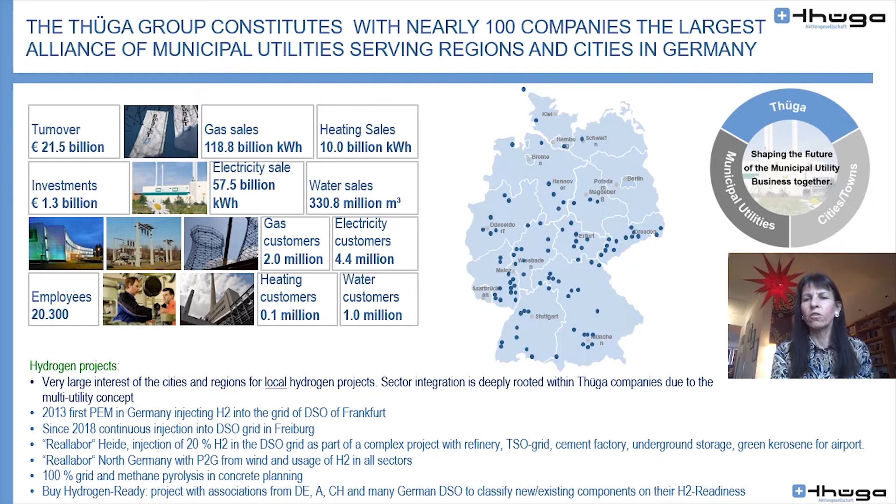But let me tell you first something about the European Hydrogen Strategy, which came out in July. It's the first comprehensive idea for a hydrogen economy with ambitious production targets. They want to build 6 gigawatts and integrate this hydrogen until 2024, and 40 gigawatts until 2030. It is focusing on renewable hydrogen, but other forms of decarbonized gases are also seen as a necessity to speed up the decarbonization of the system.

The strategy foresees 3 phases. Phase 1 is the construction of large electrolyzers close to demand centers, concentration on utilization in industry and mobility, and the planning of the EU TSO backbone, and the installation of carbon capture for existing hydrogen production.

Phase 2 sees the conversion of steel production to hydrogen, the use of hydrogen as a balancing tool for the electricity system, and the creation of the regional hydrogen valleys, which is us, with decentralized production and demand in various sectors, including buildings, and the start of repurposing of the TSO gas grid and underground storages.

Phase 3, which starts after 2030, is a large-scale deployment of green hydrogen, the massive increase of renewable electricity production, and the utilization of hydrogen in the various sectors.

To bring all this in life, and that's a lot of organization of the different work streams, the Clean Hydrogen Alliance was founded to create a project pipeline, a concrete pipeline in the areas of production, transport, distribution, and applications. At the first Hydrogen Forum on November 26, the work was kick-started.

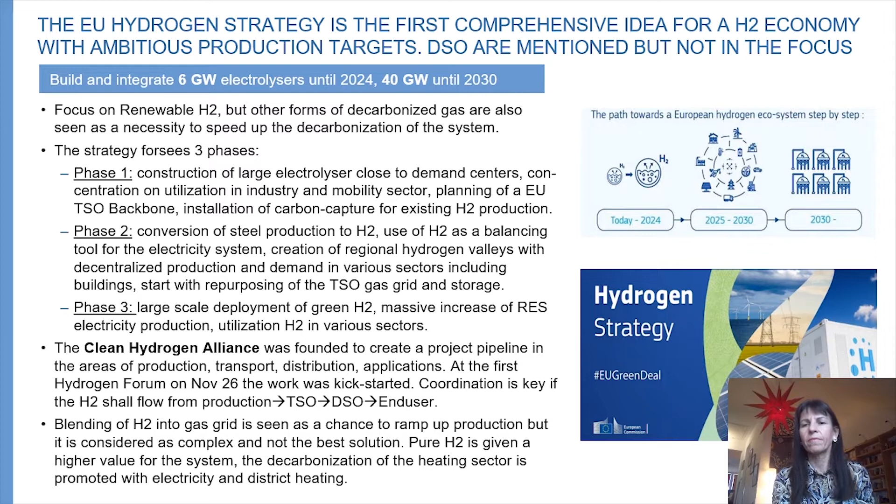What does this mean for us? We have 1,400 European gas DSOs, and we work very closely together in many parallel work streams. Most important is projects, and I love what's happening in the UK because you have so many projects happening and we always look at you.

We have many member states where the large amount of industrial consumers and the CHP plants are connected to the DSOs, which is often forgotten. So the TSO backbone will be key to build an integrated EU market across the borders, but the conversion will require time. Gas DSOs are the only ones able to bring renewable and decarbonized gases to end consumers long before the backbone is finished. To include the hydrogen into the existing market design will speed up the market uptake.

If you don't have a regulation, the hydrogen will end up in a very small market with few customers and producers connected only to the TSOs, because if they are connected to the DSO, you need to have the regulation.

Competition and liquidity needs a broad range of actors. This is what we know from the past. Guarantees of origin are needed to facilitate the trading of renewable and decarbonized gases in pure form or in blends.

Guarantees of origin are needed to facilitate the trading of renewable and decarbonized gases in pure form or in blends. They offer customers the possibility to decarbonize their heating system independent of what is really flowing through the grids. The extension of the gas grid should be considered as sustainable in the taxonomy.

So when you look at this, if you want to create the market, you have the legislation on one side, which in the case of Europe is depending on the Green Deal, but you also have the organization on the other side. And when you think about the organization, as I mentioned before, we have the project pipeline of the Clean Hydrogen Alliance, but we also have the concrete projects in the countries.

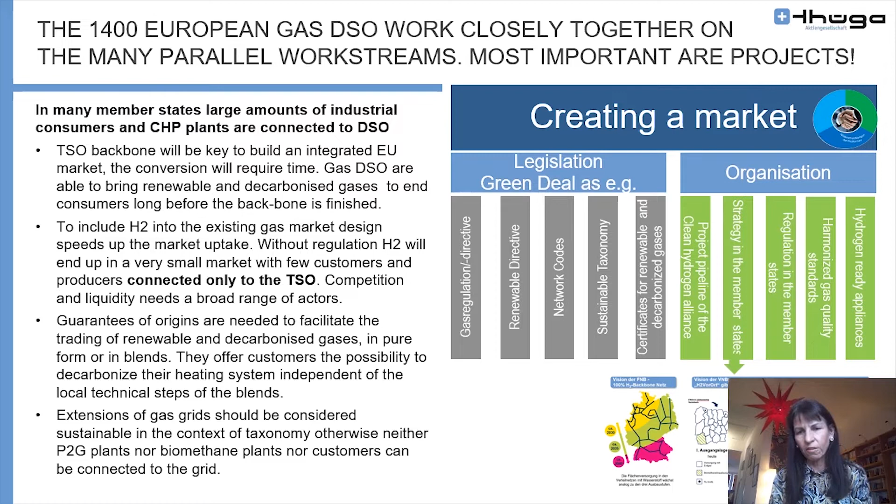This is the project in Germany, where we looked at where does the gas come from and where does it go. With Thüga, most of our companies are somewhere in the south, and that means we have to help ourselves because we cannot wait for the TSO to come.

This means that we have projects. This is the one in northern Germany where you have an electrolyzer built in the refinery. We're going to inject 20% of hydrogen into a grid to serve 215 customers. But we also have a cement production which will then use the oxygen.

This is the best thing that you can do. So you combine all the worlds. You have the industry. There is an underground storage, a salt cavern. But they also produce eco-fuels for the airport in Hamburg.

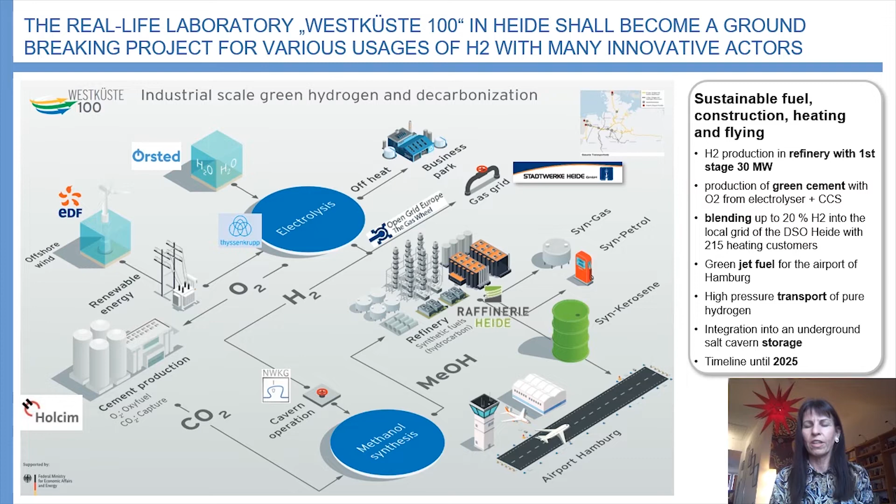And this is giving the benefits that you can use the infrastructure the most. But we also have another project, which is a regional DSO. It's not very large, considered the UK sizes.

It only has 29,000 end consumers, but it has this very specific situation that they have 6 biomethane injection points, and they have very large industrial consumers, the biggest one that we have in the whole group. They have 3 CNG stations which are connected to the grid, and they also have 3 CHP plants, which means that already today they have to deal with all sorts of gases coming into the grid.

And this was the reason why they implemented the SmartSim system, which is a smart grid system. This way we can track the gas, we can define the calorific value and also the Wobbe index at all those exit points. And we will use this when this hydrogen injection comes up here with a wind farm, so that we can track the hydrogen.

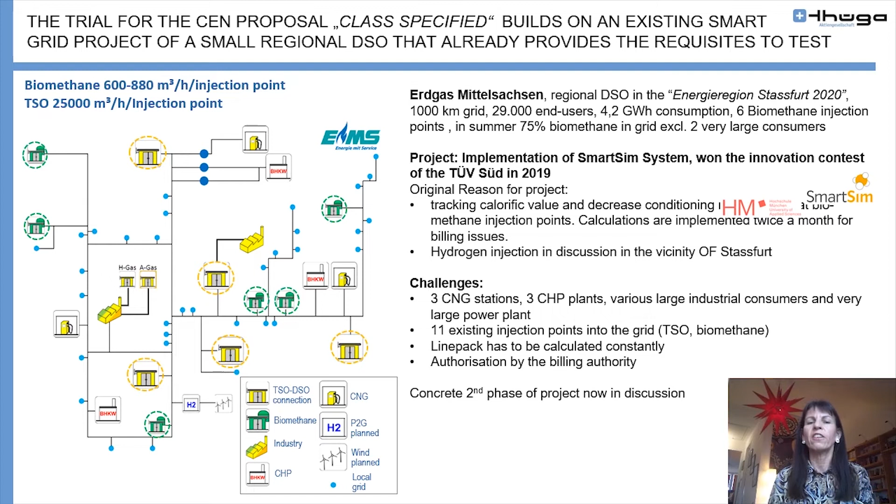And what we will do then is a forecast to know where the hydrogen will go. This is very important if you want to operate this kind of a system. Here you can see the simulation running with all the different kinds of injections that we have, and we can always track where the gas is flowing to the end consumer, which is very important if you want to make sure that you always know, for example, how much hydrogen is in the grid at the specific point of the exit.

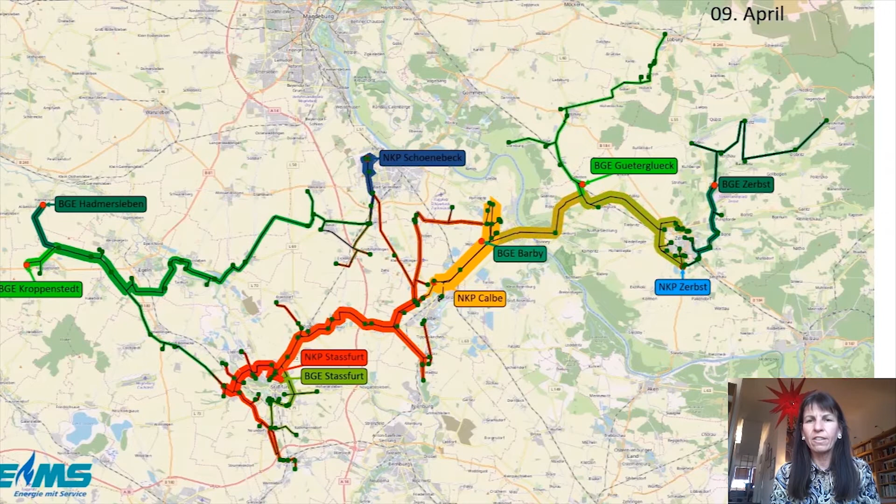This was just a very short introduction of what we are doing in Thüga and what is happening in Europe.

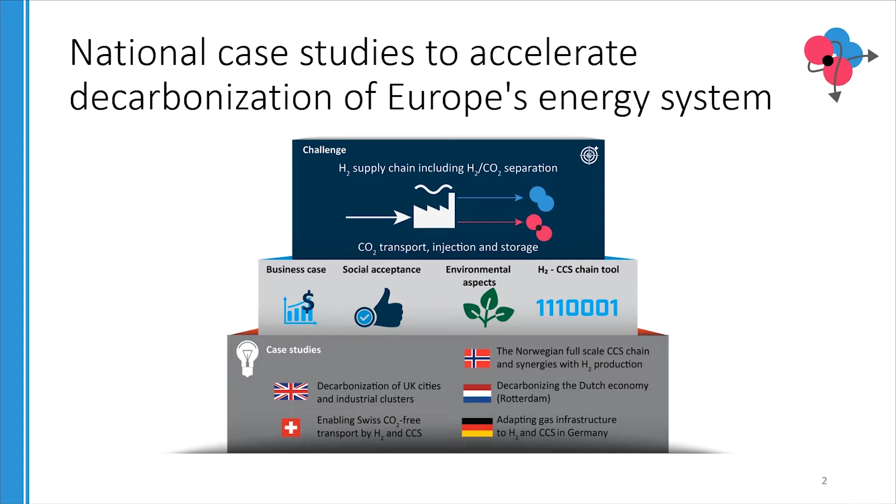Today I would like to focus on the case studies and the case study results. On this slide, you can see the main topics that have been included within these case studies, where there is one case study per participating country.

A key part of the work with the case studies has been to identify the potential role for hydrogen in these countries or in regions of these countries.

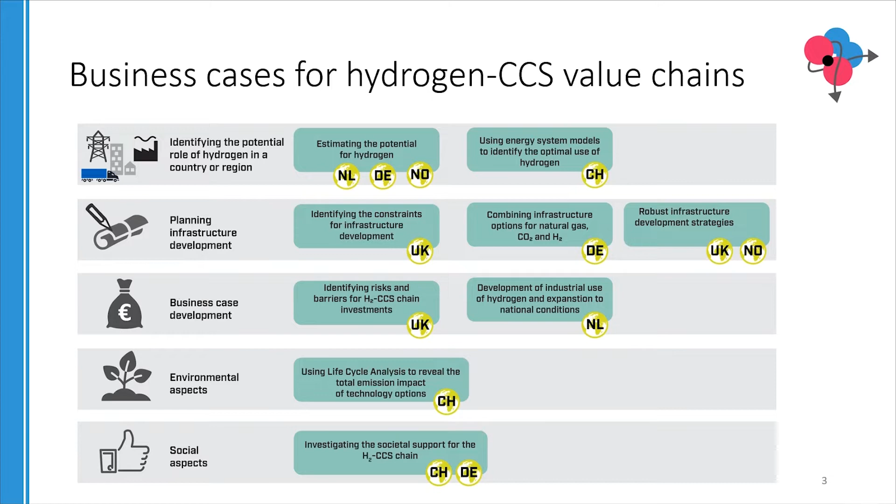The next issue has been to work on the planning of infrastructure development, and to this end the optimization tool for infrastructure development has been applied in several of the case studies. The business case development tool has been used for business case development, and environmental aspects have been investigated through life cycle analysis, and social aspects have also been investigated by looking at societal support for hydrogen and CCS value chains.

Today I would like to present 4 observations of what we have found significant from the case studies. First, the industry sector is key in realizing a hydrogen sector at a sufficient scale to achieve reduced costs for the hydrogen economy.

The second observation is that business cases for hydrogen and CCS value chains must be defined and evaluated in the context of reaching net zero by 2050. Specifically in the UK case studies, it was found that a delivery body or organization is required, with a clear mandate to coordinate the UK system-wide business case for all regions and all sectors. This is key in steering the country towards a net zero economy by 2050.

The third observation is that for several of the cases, developing cost-effective infrastructure relies on the availability of sufficient storage facilities for both hydrogen and CO2. These aspects are key when assessing the possibilities for developing a hydrogen economy and for developing hydrogen and CCS value chains.

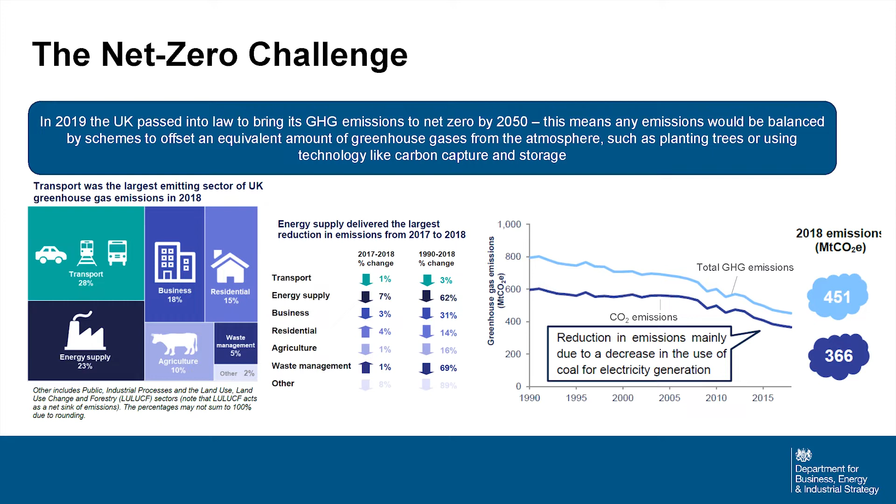However, as we sit here in 2020, in order to achieve 2050 net zero, we appreciate that we have to tackle the much more difficult sectors, including domestic heat, industry, and transport. Our analysis shows that hydrogen is a key vector for achieving progress in all of these areas.

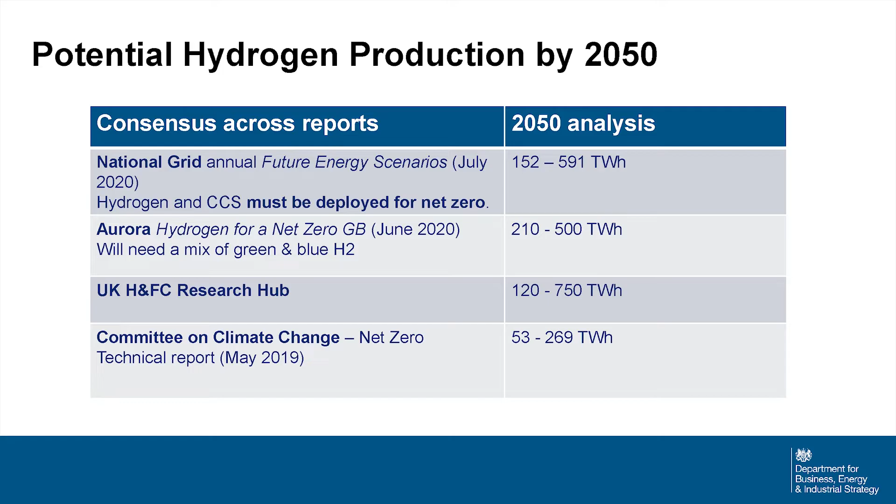I'm now going to discuss in more detail what we've been doing in BEIS using our energy innovation portfolio to develop solutions in this area.

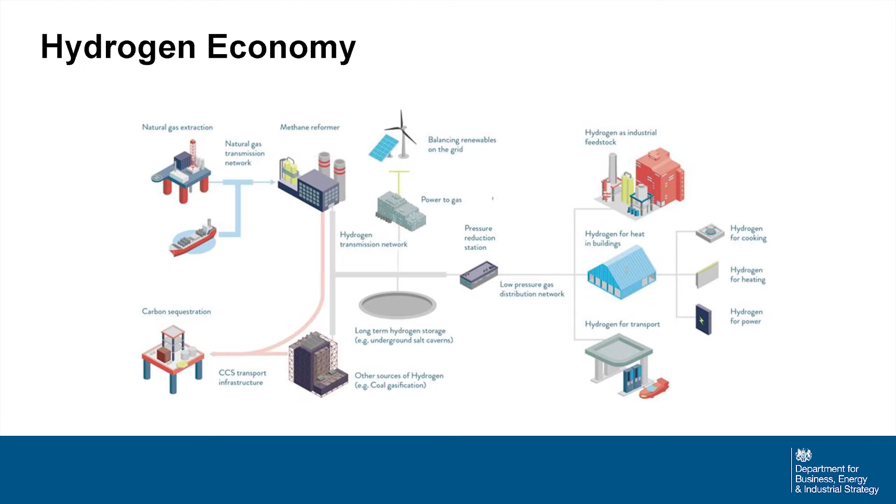Now I present a schematic of how a 2050 hydrogen economy could look. As you can see, it's quite complicated, including capacity to develop blue hydrogen, making hydrogen from methane and capturing and storing the carbon dioxide emitted, and also the capacity to take green hydrogen, particularly from renewables. We also need storage, particularly interseasonal storage, and we're able to supply all three vectors I discussed in the last slide: transport, domestic heat, and industry. I'll now show you how we intend to tackle this via innovation.

We started our innovation competitions with a focus on hydrogen supply. Obviously, for a hydrogen economy you need hydrogen, but we wanted to ensure any hydrogen we were making was compatible with net zero. That means replacing the current technique of steam methane reformation with either blue hydrogen, which is steam methane reformation with carbon capture, or green hydrogen. We are trying to support the development of both technologies.

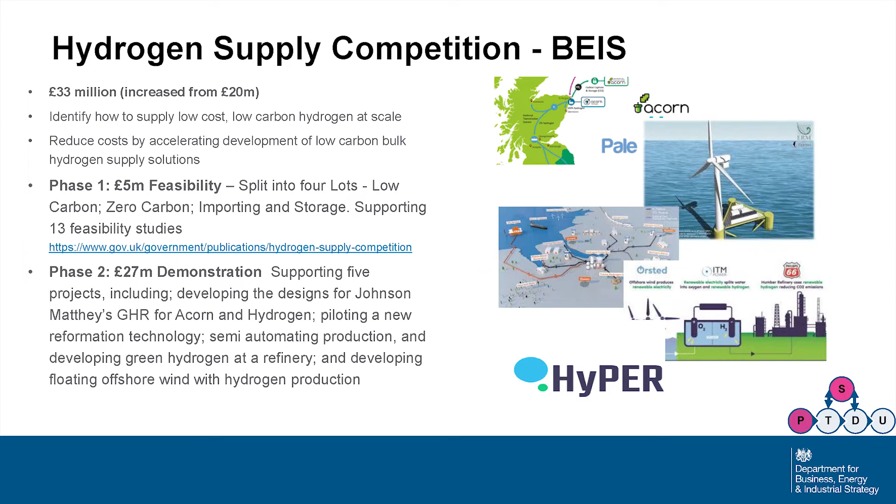We received an overwhelming response to our original £20 million competition and ended up allocating £33 million. This includes development of advanced thermal reformers with very high carbon capture rates, for deployment in UK industrial clusters by the mid-2020s. We are also supporting development of green hydrogen technology using offshore renewables, including a project generating hydrogen using floating offshore wind. Now I'd like to present a case study of one of our green hydrogen supply winners.

This is a consortium of Ørsted, Phillips 66, and ITM. What they're looking to do is take renewable electricity from offshore wind, produce large volumes of hydrogen using a large-scale electrolyzer, and use that hydrogen in the refinery process to drive down CO2 emissions.

On the graph on the left, you can see ITM's own analysis of the impact of the BEIS innovation funding. Their graph clearly shows that our innovation funding, intervening at this stage, greatly enhances their chances of delivering large-scale electrolyzers by the 2030s, and this is exactly what we want to achieve.

As you can see, it includes a FEED study for a 100 megawatt electrolyzer, an order of magnitude larger than the largest current electrolyzers. This is exactly the scale we need to meet the volumes of hydrogen production I talked about earlier in this talk.

A particularly exciting component of this project is that, as well as developing the technology for the electrolyzer itself, we are supporting development of the manufacturing equipment to enable large-scale production of these electrolyzer stacks. This is leading to the development of the largest PEM electrolyzer factory in the world, in Sheffield, by ITM.

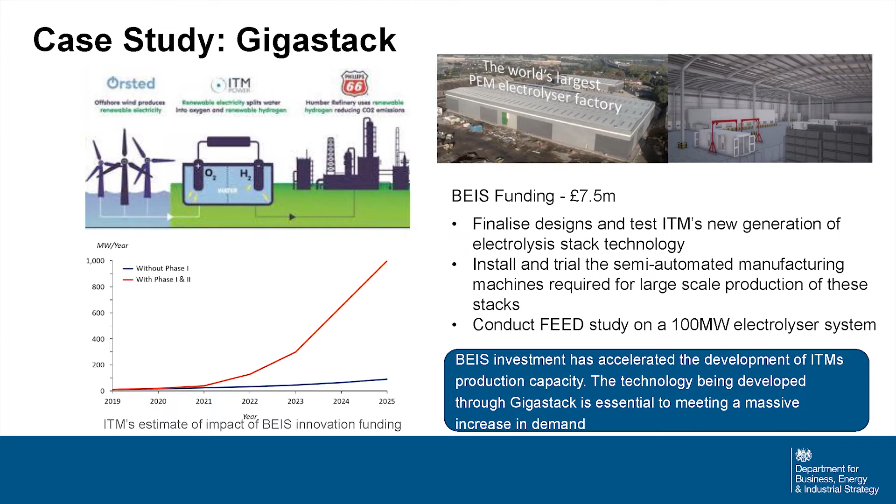You will shortly hear from a number of other speakers about the innovation that's taken place using Ofgem supported programs, NIA and NIC. They will tell you how we are developing solutions to decarbonize the national grid and the distribution grid, ready for the hydrogen transition.

I'm now going to talk about one of our innovation programs, industrial fuel switching, which tackles the decarbonization of industry. In beginning this program, we first did a comprehensive survey of the industrial sectors in the UK and identified decarbonization routes for all of the industrial processes currently taking place. We found that hydrogen was a key vector for a large number of these processes.

However, we met one challenge: many of these solutions are at quite low TRL levels, typically between TRL 4 and 7, nowhere near the TRL 9 level required for any industry to convert fuel with confidence. What we want to do with our program is develop programs that enable us to demonstrate and start to develop these solutions, moving them up the TRL levels, ready for deployment in a hydrogen economy.

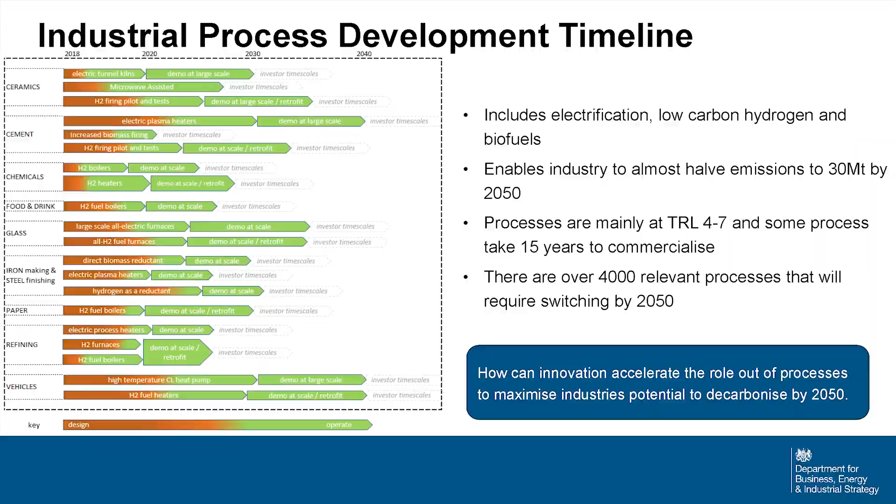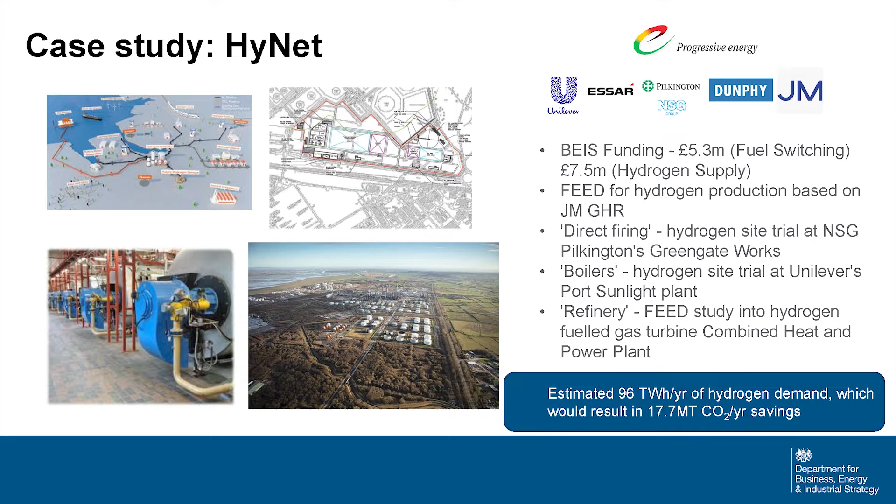I would now like to showcase the HyNet Project, which has benefited from two of our innovation programs, the Hydrogen Supply Competition and the Industrial Fuel Switching Competition. In this program, they will be developing a low-carbon hydrogen production facility using Johnson Matthey's Advanced Thermal Reformer. This will be installed at the Essar refinery site, and we will also look at the usage of hydrogen following this project. This includes a CHP at the refinery site, and also looking at the use of hydrogen for direct firing in the manufacture of glass at NSG Pilkington, and the use of hydrogen boilers at Port Sunlight Unilever site. This is a demonstration of both how a hydrogen economy might work, and there are plans, by using blending as a means to boost hydrogen consumption, to be able to convert the entire Northwest to a hydrogen economy. We're delighted to be supporting this work.

I'm now going to discuss one of the biggest challenges we face, which is the decarbonisation of domestic heat. 85% of UK homes are on the gas grid at the moment, so they are heated by methane. And methane, when it's burned, produces water vapour and carbon dioxide. We would like to explore using hydrogen in place of methane. In order to do that, there are a number of fundamental things we need to do, because the physical properties of hydrogen are very different from methane. The way it burns, the way it behaves as a gas, the way it diffuses needs to be understood, and we need to develop appliances that can effectively use hydrogen safely in the home.

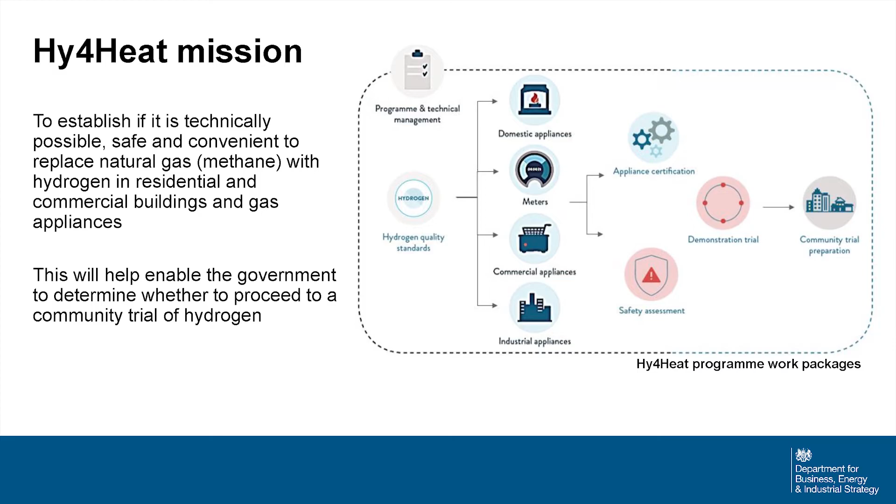To do that, we have developed domestic appliances using the Hy4Heat program. We've developed commercial appliances. We have investigated and evaluated solutions for industry, some of which I've already shown you. We have also developed hydrogen meters, because obviously we need to be able to measure, just as we do today, the amount of gas being consumed by the consumer. We have also developed a number of key standards, including PAS standards for hydrogen appliances, and we are currently preparing the ground for PAS standards for the installation of hydrogen appliances. And we have also developed standards for hydrogen gas, and definitions that can be used in any national rollout. We are doing this work to prepare the ground for community trials where we can deploy hydrogen in a community, demonstrate its effectiveness for the consumer and its safety for the consumer.

Here is some more detail of the appliances we developed under the Hy4Heat programme. Of particular interest is the concept of hydrogen ready, which we've deployed on our hydrogen boilers. So rather than producing hydrogen boilers, we produce boilers that can run on both methane and hydrogen. What it involves is you could buy a hydrogen ready boiler on the market, hopefully by 2025, and burn it with methane. But if your area was to convert to hydrogen, for example in 2028 or 2030 or even later, you could deploy a kit that would convert that boiler into a hydrogen boiler, at minimal charge on top. So this would allow us to start a rollout of boilers that are ready for a hydrogen transition before we have made a final decision about the hydrogen transition.

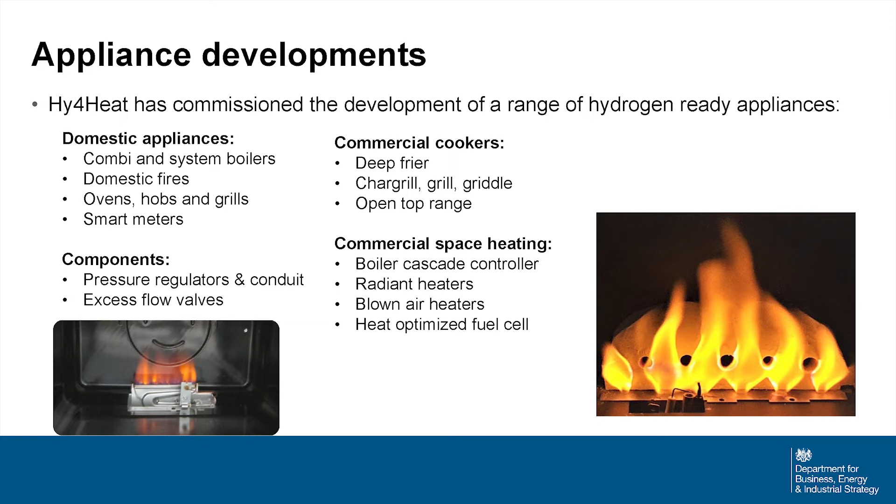We've also developed a number of appliances. I've shown you here a hydrogen fire and a hydrogen oven, and I hope you'll agree with me that the flame looks very nice indeed. I think this has set an important step forward to give the government confidence to proceed with a hydrogen rollout. You can see from the Prime Minister's recent 10-point plan for a green economy, we can set out ambitions to have a hydrogen town by 2030. Of course, there's a lot of work to be done before that, but Hy4Heat has already had a positive effect on government policy and allowed it to send positive signals like this.

The most important component is the development of a safety case, which we have currently submitted to the HSE. What we're looking to do there is persuade the HSE that we understand hydrogen well enough to proceed with small-scale trials.

Over the coming years, we will seek to develop our understanding further to enable us to move towards larger-scale trials, and indeed a hydrogen town by 2030.

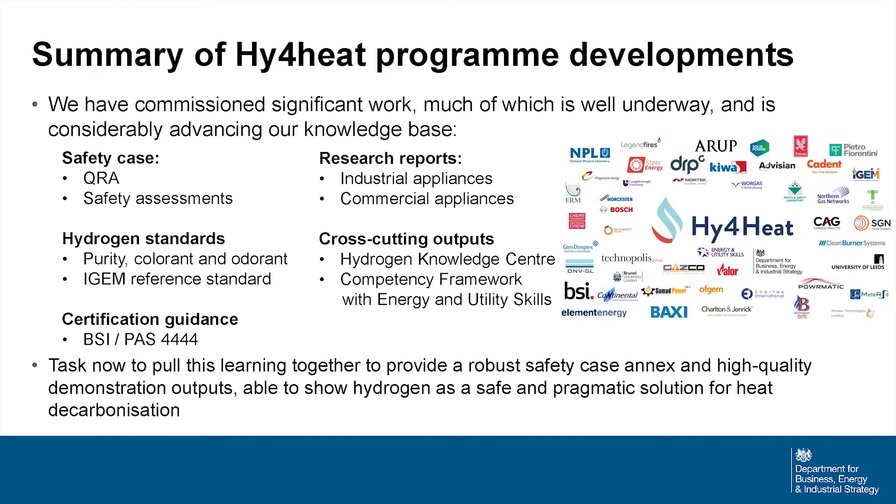As well as establishing a robust safety case for the use of hydrogen in the home, it is very important that we can demonstrate to consumers the capabilities and behaviour of hydrogen in the home. As part of that, we have developed a number of demonstration facilities.

One is a mobile facility, which we'll use to showcase all of the Hy4Heat programme work at COP26 next November. But we are also looking to expose the consumer to hydrogen directly.

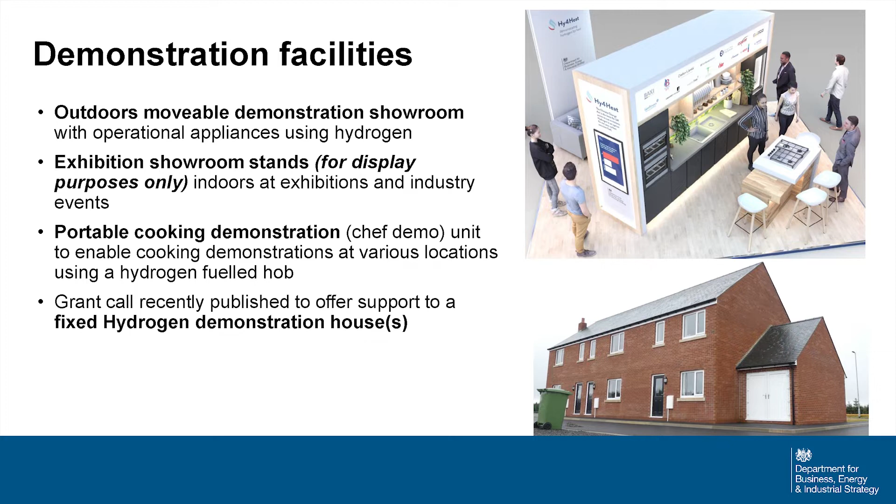One way we can do this is with our current Hy4House call, which is looking at one or two hydrogen homes that can be visited by members of the public, but also by politicians, local politicians, and other stakeholders that we may want to engage in preparing the ground for a trial.

Now we need to think about next steps. In fact, the next steps are really building on this foundation and continuing to develop technology, moving it up the TRL levels and proving it, particularly for industry.

So we need to develop appliances in the industrial sector that industry can be confident will deliver when they switch their production lines to hydrogen.

We also need to start moving towards deployment. You've recently seen from the Prime Minister's 10-point plan that the government will start to invest significantly in low-carbon hydrogen production facilities. It's really important we do that because we need the hydrogen production capability in order to get to net zero.

But we also need that volume of hydrogen to do the testing that we need for industry, and to do the trials that we need to do to prepare the ground for deploying hydrogen for domestic heat.

We also need to continue to develop the work we've done on Hy4Heat. That includes developing further standards, skills training, and further refining the safety case, particularly with a view to more complicated properties than the two-up, two-down we've looked at so far.

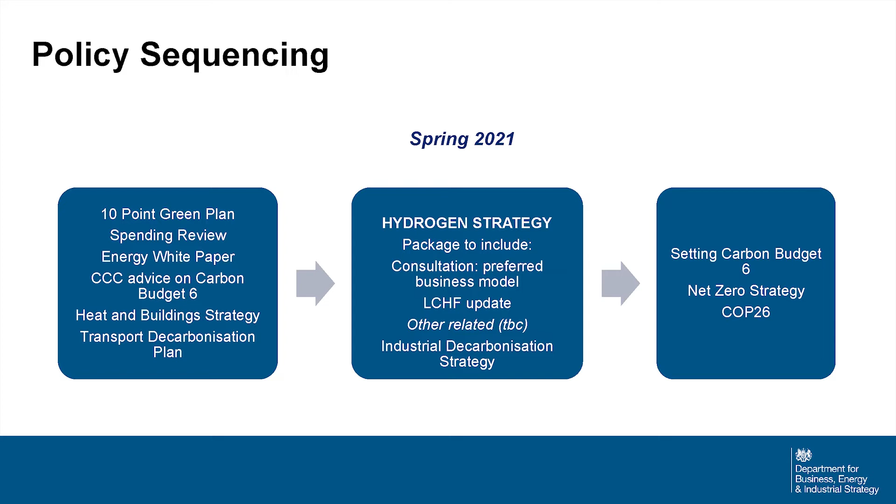Also, in the longer term, we have the opportunity of COP26 to showcase what the UK is capable of. We're also developing a number of strategic papers, including the Energy White Paper, which is due quite soon, and also the Industrial Decarbonisation Strategy.

All of these provide the ideal landscape for us to turn the innovation I've just shown you into deployment, and more importantly, into solutions that will deliver net zero. Thank you very much.

Hi, I'm Tim Harwood, H21 Project Director, and I'm going to spend the next few minutes giving you an overview of the H21 suite of projects.

The purpose of H21, in a nutshell, is to focus on demonstrating that the existing UK gas distribution grids can be repurposed to carry 100% hydrogen in a very, very safe way, with minimum disruption to customers.

So what have we done so far? H21 is split into 2 phases at the moment, with the potential for a 3rd phase, which I'll come on to speak to you about at the end of the presentation.

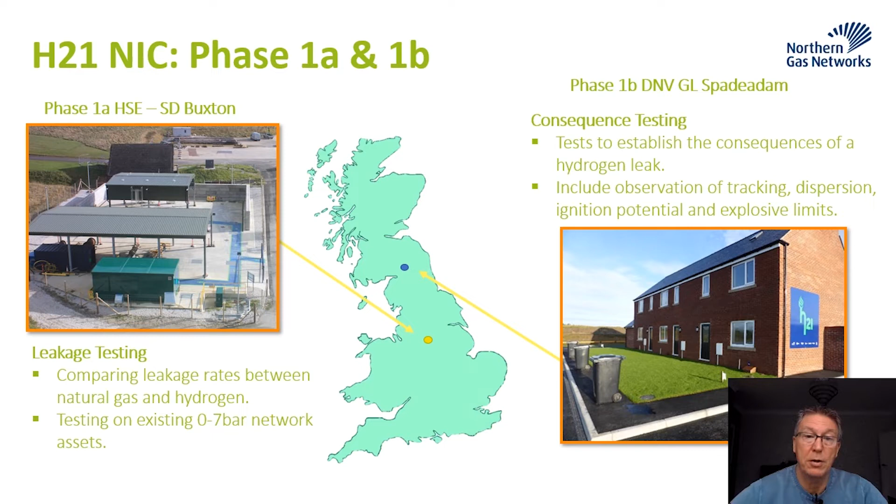Another important part of the H21 trial is the social sciences. We feel this is just as important as the scientific research, in that we must have social acceptance of hydrogen in order to be able to push forward the programme of widespread conversion of networks.

The great news is we worked with a fantastic university in Leeds called Leeds Beckett University. They're really good at doing the social sciences work, and the results are really good for us and really positive. The public felt that safety wasn't a major concern. Obviously, cost and disruption are the two main barriers, but it was felt that if we took a big step towards decarbonisation by converting the networks to hydrogen, they would be prepared to pay a small premium for that.

They're able to digest quite technical information and return it and explain it, but what they don't like is acronyms. They don't like difficult terms like decarbonisation and other things like carbon capture and steam methane reforming. They want to be told the facts, and they want to be brought along with the journey, but they'd like it done in plain English.

Keywords and phrases are important, and some of the further research we've done in phase 2 of the social sciences shows that how you explain things to customers via letters and social media, how you change keywords, is very important in getting them to understand and sign on to what we're trying to do. So alongside the safety related work, it's very important that the social sciences are also taken account of - it's every bit as important as the safety related things we're doing at the moment.

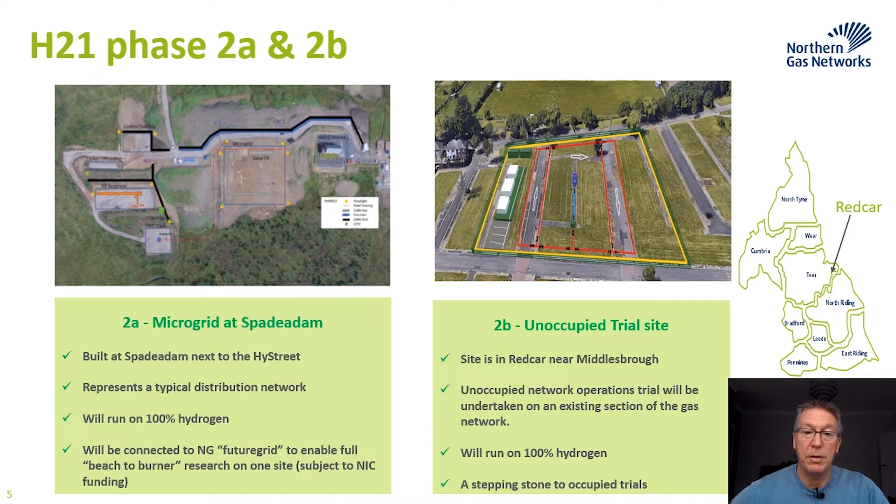I'd like to spend a couple of minutes talking about the potential next phases of H21, Phase 3 and beyond. We've got a funding bid in and we're talking to BEIS at the moment about Phase 3, which would be a continuation of the work from Phase 1 and Phase 2 and basically would finish the programme off. We'll have gone from scientific research through to trials on secure networks and unoccupied trials, and now we need to finish off the programme by doing trials actually out there in the community of live 100% hydrogen in people's homes.

We've put forward a proposal to do a trial starting off with Phase 3A, which is 50 houses, and then Phase 3B is a further 620 houses. The timings for those are Phase 3A, if everything goes well with Phase 1 and Phase 2 and we get the sign-off from our regulators, we could be potentially doing live trials in houses by the midpoint of 2022, and then approximately 12 months later, expanding the trial out to a further 620 homes for another year. So you're talking about mid-2024 getting up to 2025 when we could have finished our programme and demonstrated that we can run and manage safely and effectively 100% hydrogen networks.

And then we should be getting ready for conversion after that. It's a case of a government policy decision coming along and the stimulation of production, so there's plenty of hydrogen freely available to start planning out to do conversions. We're really pleased that in Northern Gas Networks' geographic patch we've got places like Teesside and the Humber region that are touted as being the start of the industrial clusters. So there'll be the decarbonisation of large process plants, power generation, steelworks, glassworks, those types of things, but also making sure there's enough hydrogen available to do homes.

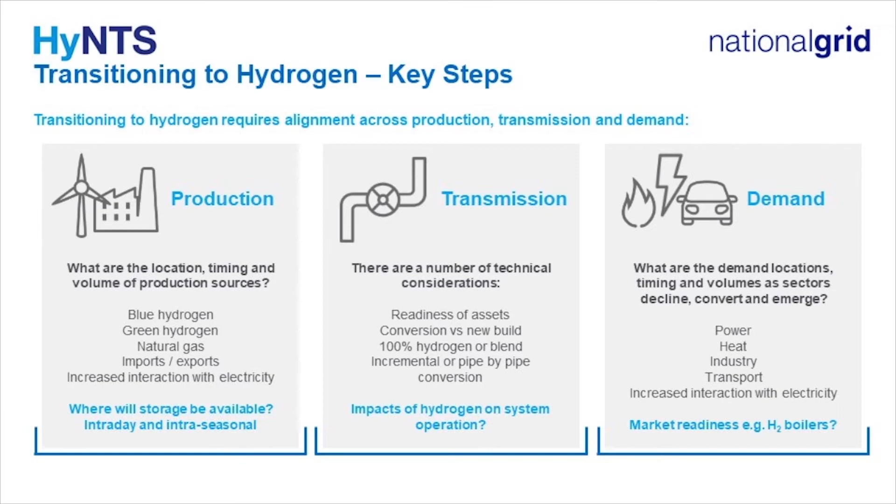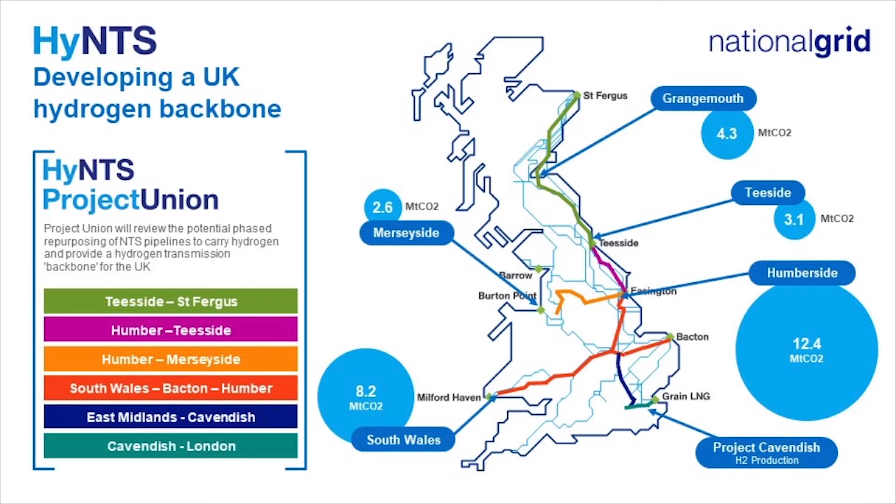So this is in concept phase at the moment. We're working through the realities of this, looking at the feasibility and timing, and it's something I'd hope to be able to talk more about in the future with you.

So the first of them is materials concerns, looking at things like the materials effects on pipelines and mechanical assets. You may have heard of hydrogen embrittlement. We're trying to understand what that means for our pipelines, whether we can still operate as we do today, or whether we need to introduce some sort of mitigations to reduce the effect on the pipeline steels.

We're also looking at things like soft parts and seals. We've heard that, for example, metal sealing valves are perhaps more suitable for hydrogen than soft sealing valves. And we're looking at things like weld quality and how that interplays with hydrogen embrittlement to change the risk profile of our pipelines.

The second is safety concerns. Hydrogen is quite a different gas - it has different characteristics in terms of building proximity distances, and the heating value from flames and explosions. We've got to rethink things like the hazardous areas around our equipment, since it has a different gas classification in terms of the electrical equipment you can use around it, so we'd have to evaluate all the electrical equipment across the network and understand whether that's still compatible.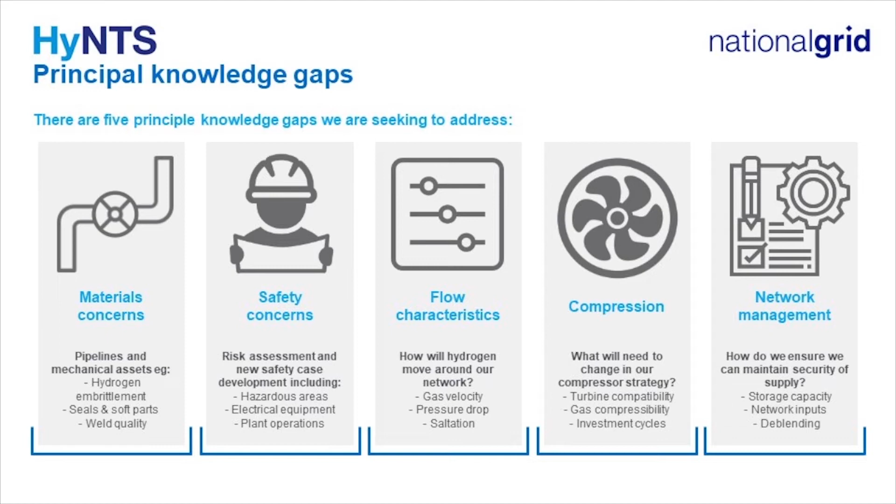And then finally, network management, which links back to flow characteristics. We've got to ensure that we can maintain security of supply, because that's a really important objective for us. For example, we have less inherent storage within the network with hydrogen. At the moment, we have a day or more of storage just within the gas contained in the network, but because of the decreased volumetric energy density of hydrogen, that's going to change. So how does that change the way we manage the network? And what are the other factors we need to consider, things like deblending, or whether there's going to be distributed hydrogen coming onto the network.

So to give a little bit more detail about some of these projects, I'll go through a few now. There's the feasibility of the NTS project, which was an initial look at the materials effects done with the Health and Safety Executive's science team. Essentially, that looked at the very first pass, saying can the gas networks transport hydrogen, yes or no?

And so to that end, it was quite a promising result. Although there are effects from hydrogen embrittlement on our pipelines, these can be mitigated, and the network is by no means a write-off. There's a lot of things we can do. For example, small amounts of oxygen can almost completely negate the effect that hydrogen embrittlement has on our pipelines. So that's a really positive finding that we're looking at evaluating further.

We can also change operational practices. For example, we pressure cycle the pipes at the moment. We ramp up the pressure generally overnight to make use of that inherent storage and then drop it down over the day. But we might change the way that we do that to, again, mitigate the effects of hydrogen embrittlement.

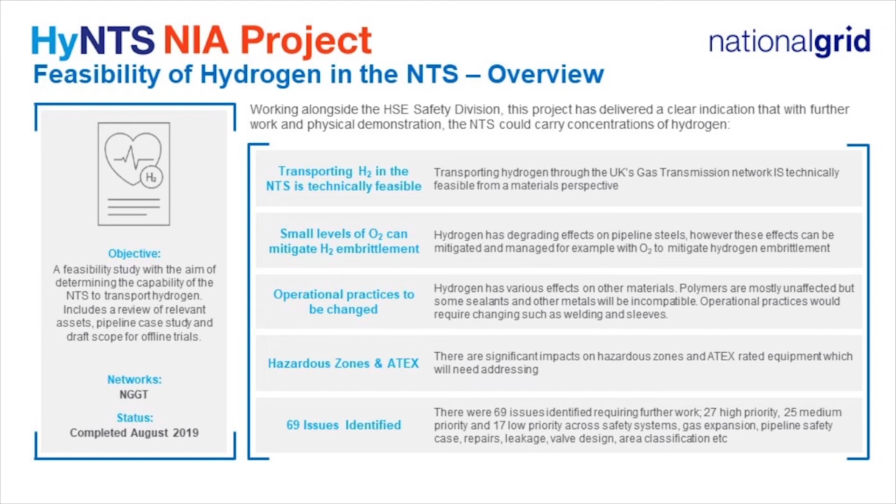So hazardous areas I've talked about as well, in terms of electrical equipment and ATEX equipment. And there were quite a number of materials issues identified, 69 that we identified through this project, which we're evaluating at the moment. But it's all stuff that's in hand with the Future Grid project that will be talked about in a bit more detail later.

Looking at deblending, I mentioned earlier around how we might need to change the way that we operate the network. So deblending is just one example of that. You may have heard recently with the announcement that we're looking at blending hydrogen onto the network. We've got to think about where there might be customers who might not necessarily be ready for hydrogen. Is there a way that we can separate the hydrogen out for their particular facility and then transport that down the rest of the network to a customer who can accept it? And so there was a project evaluating the impact of that.

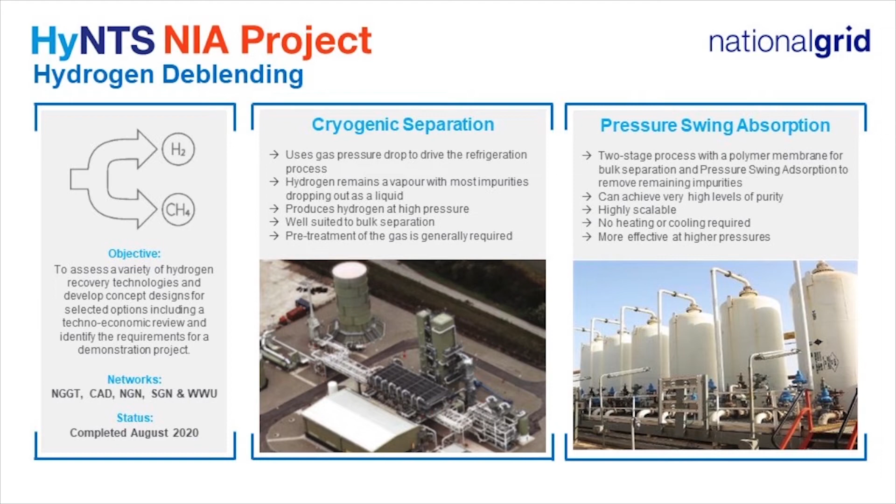This was done in collaboration with the other gas distribution networks, and it was all using well understood chemical industry technology. There's again quite a positive result in terms of it being possible, and then there's just more work to be done to understand what it might actually look like.

Other projects of note would include Aberdeen Vision, so that's looking at whether we can inject hydrogen at the gas terminal at St Fergus, and then flow that down north to south into the rest of the network. And that's quite an interesting project in terms of understanding the kind of scale of generation you would need to just generate hydrogen on the network, and what kind of storage you might need to soak up the supply demand mismatch.

There was Project Cavendish, looking similarly at a regional part of the country, but focusing more on London and the southeast, understanding how you might use the Isle of Grain and the facilities there to flow hydrogen into London, and how you might stimulate a demand through the industrial customers within London.

There was the Hydrogen Flow Loop project, and that was looking at whether our existing X52 pipe can carry hydrogen at 30% blend, and how that performs compared to a new pipeline construction technology called MASIP.

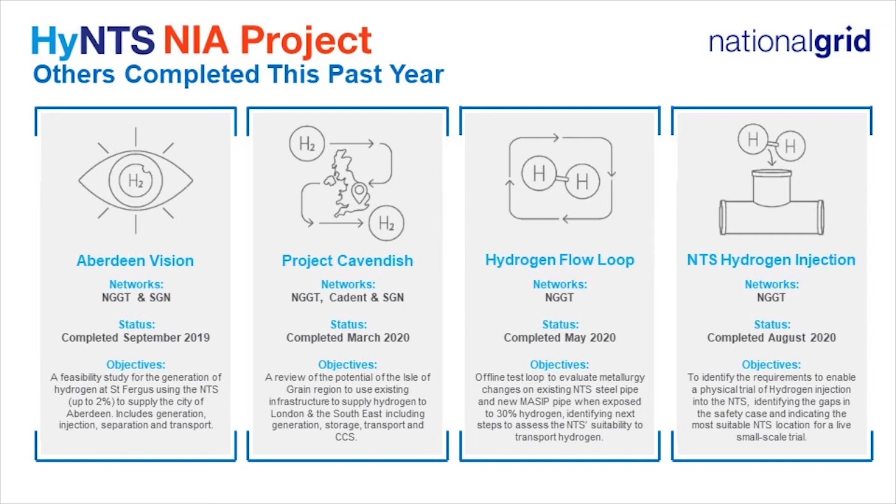And then finally, this NTS Hydrogen Injection Project, and that was looking at if we were to go ahead and do a trial and inject hydrogen into the live network, what might that look like? Who would be the best customer to take it for a first stab? And then that ultimately led to the creation of the Future Grid project, which Tom is going to talk about now.

So the NIA for Future Grid is part of a wider programme of work. Future Grid is an ambitious programme to build an offline test facility using high pressure gas pipes to actually demonstrate that our NTS can take hydrogen.

The work we've done to date to understand some of these issues is going to be demonstrated through this project. A key step to achieving the Future Grid Phase 1 project is our NIA project, Roadmap to Future Grid, which develops the principles and specification of the proposed offline test facility, building on learning from our NIA projects and other gas distribution networks.

Key deliverables for this NIA include inputting information for designing the test facility, developing a comprehensive master testing plan that covers all identified issues, demonstrating that assets can take hydrogen at blends up to 100%, and conducting initial asset integrity testing and interpretation to feed into the facility design and master testing plan.

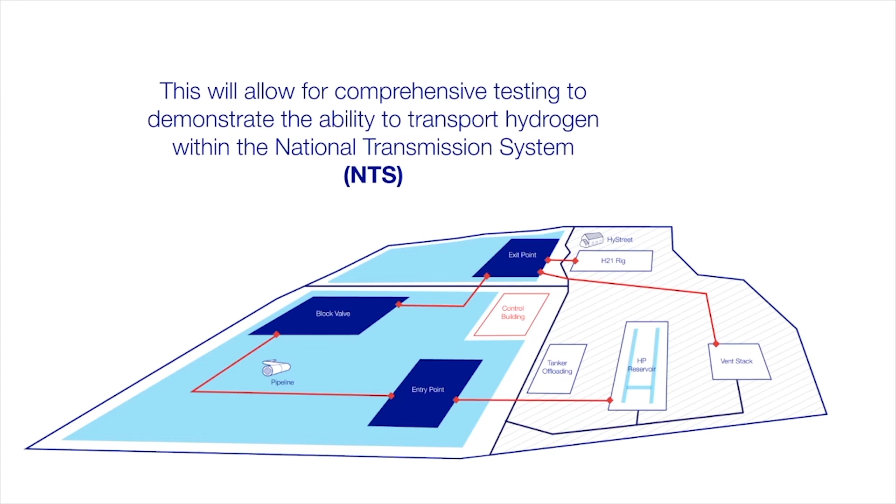Future Grid is an ambitious programme which seeks to build a hydrogen test facility at DNV GL Spadeadam. This will allow comprehensive testing to demonstrate the ability to transport hydrogen within the National Transmission System, NTS. So what does the programme look like?

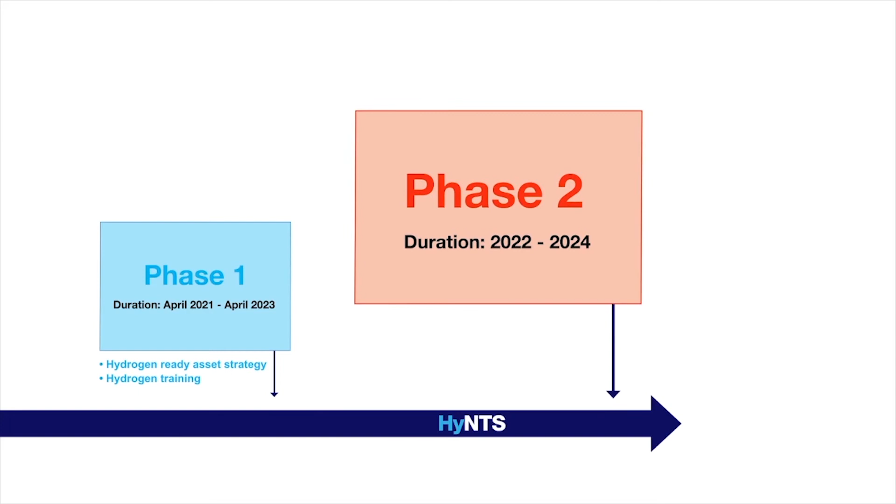In Phase 1, we will build an offline test facility to demonstrate that hydrogen and hydrogen blends can be transported effectively, flexibly and safely in the existing network. In Phase 2, we will explore different deblending technologies to separate hydrogen from natural gas and demonstrate the impact of hydrogen on compressors. In Phase 3, we will open the facility to third parties to test their own technologies and run specific impact assessments.

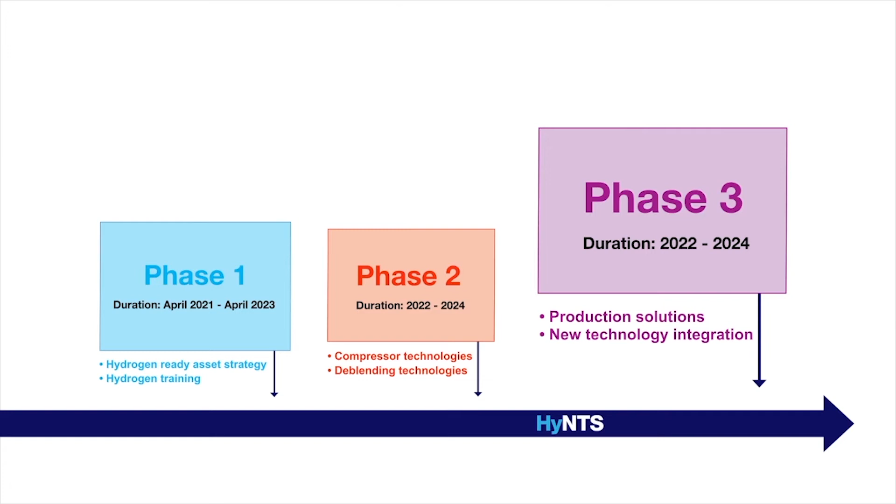The test rig will be made up of a representative set of decommissioned assets, which can be tested at different levels of hydrogen up to 100%.

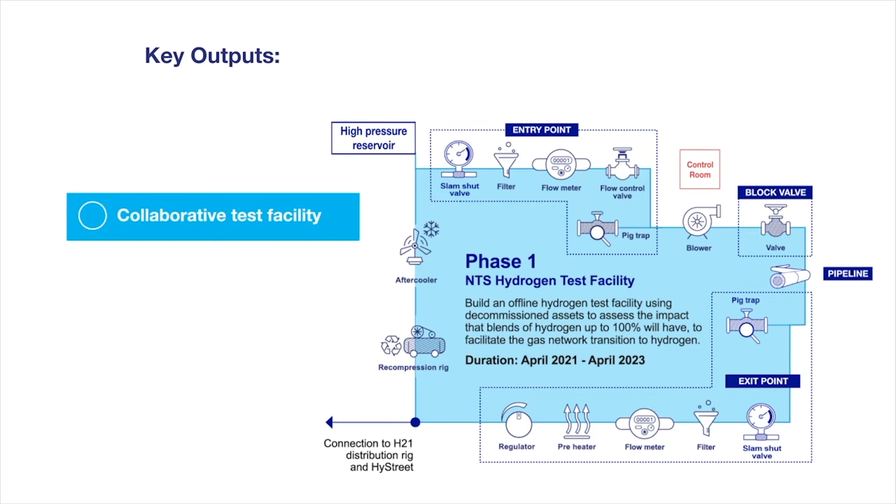So what will the project deliver? A representative hydrogen transmission test facility built out of decommissioned assets to accelerate our move to zero carbon. Demonstration of the ability to operate the network with up to 100% hydrogen. Improved collaboration across the industry, internationally and with other sectors towards their decarbonisation goals. A world-class training facility to upskill engineers in constructing, operating and maintaining transmission assets in hydrogen.

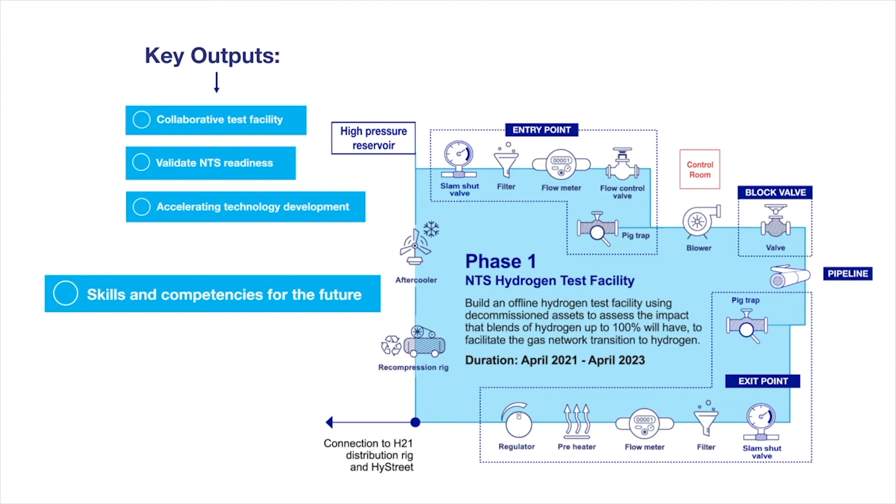So who are we working with? DNV-GL are our main delivery partner, building the facility and carrying out the testing, supported with technical assurance from the HSE Science Division. We are partnering with Northern Gas Networks to link with the H21 Project, which is building a distribution test facility at the DNV-GL site.

Fluxys are our equivalent in Belgium and are contributing a substantial level of hydrogen research to ensure a collaborative approach internationally. Durham University and the University of Edinburgh are academic partners who will ensure learning from Future Grid and hydrogen prepares our future UK talent for the Net Zero Challenge. Phase 1 is an exciting new step in the transition to hydrogen and a net zero future.

LTS stands for Local Transmission System. The LTS Futures Programme is designed to develop the safety, technical and practical evidence to support the use of hydrogen in the LTS. The research work proposed underpins many aspects of the decarbonised pathway.

The work will provide evidence informing network safety to determine the suitability of LTS network assets for hydrogen, provide the technical input to ensure decarbonisation of industrial clusters can be delivered, and define the role of the LTS in system transformation and the impact of hydrogen rollout and green recovery.

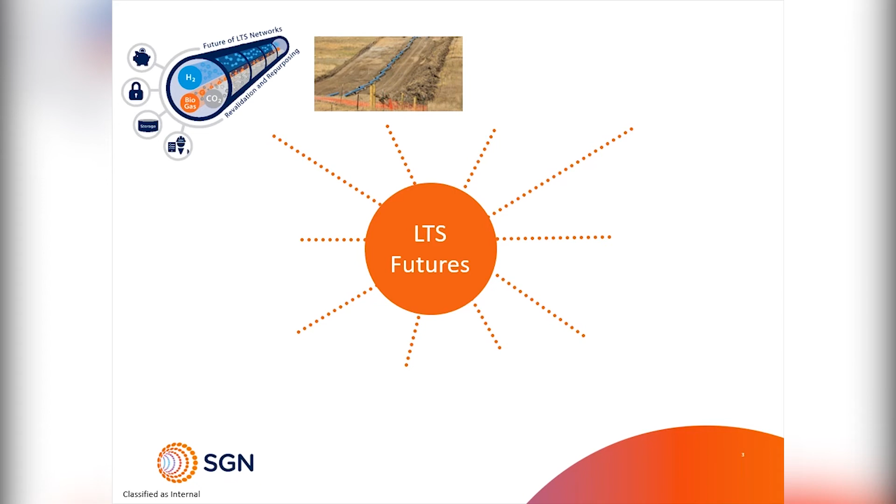This is earmarked on an SGN network as the Granton to Grangemouth pipeline, to deliver a blueprint to repurpose an LTS pipeline for hydrogen, and ensure all gaps are filled to repurpose the current LTS network for hydrogen. Current projects which will benefit from the LTS Futures Programme are the SGN projects H100 Fife, East Coast Scotland's Industrial Cluster, Aberdeen Vision, Southampton Water Decarbonising Study, Project Cavendish, Cadent HyNet, National Grid's HyNTS and H21.

The first phase of the Future of the LTS programme was a scientific feasibility study which looked at repurposing the LTS pipelines for hydrogen and CO2. It included both looking at the compatibility of materials and the risks posed to people by pipeline failure.

An assessment has shown that a significant percentage of SGN's LTS pipeline consists of relatively low strength pipeline grades that operate at low stresses. Case studies were used to test pipeline risk assessment methods and to bridge any gaps in existing knowledge.

These case studies included the mothballed pipeline from Granton to Grangemouth, which has been identified as having potential to be repurposed for hydrogen transportation. SGN held a workshop to share the findings of the work to date and to identify any new gaps. The workshop was held in Edinburgh in February, where both SGN and National Grid presented on the work they had completed to date.

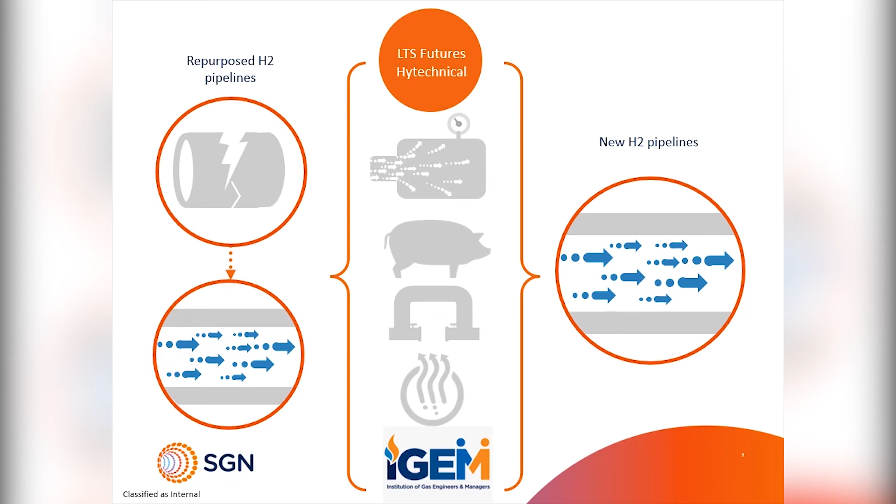The SGN LTS network was designed and constructed to operate with natural gas. However, the majority of the LTS network is no higher than X52 grade carbon steel and operates at below 30% SMYS, specified minimum yield strength, and is therefore theoretically suitable for hydrogen.

The GB's LTS network dates back from the 1960s, and over the years pipelines have been manufactured to varying quality standards. Therefore, existing assets of appropriate grades of carbon steel, i.e. X52, may not be manufactured and welded to the same quality as equivalent pipe today. To understand if these pipelines can be repurposed for hydrogen transportation, material testing and further analysis is required.

In order to develop a blueprint for repurposing LTS pipelines, it is proposed that a trial and demonstration incorporating SGN's Granton to Grangemouth LTS pipeline is undertaken.

The mothball pipeline, currently filled with nitrogen, is deemed to be representative of the GB LTS network. It's spiral seam pipe, X52 carbon steel, fabricated in the 1970s. Repurposing live pipelines would be expensive due to the additional diversion work required to maintain security of supply.

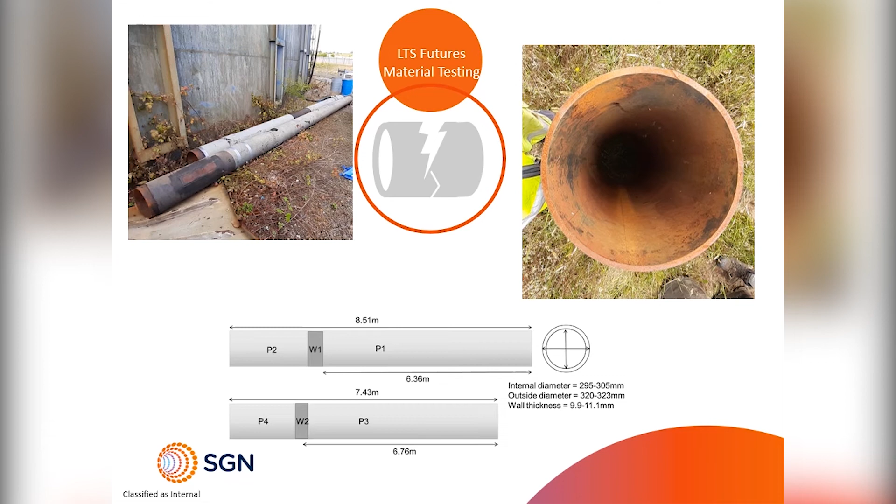The graphic shown encompasses the work that will be completed by HyTechnical, as well as the material testing completed in the labs. There are currently no methods for undertaking live repairs on hydrogen pipeline.

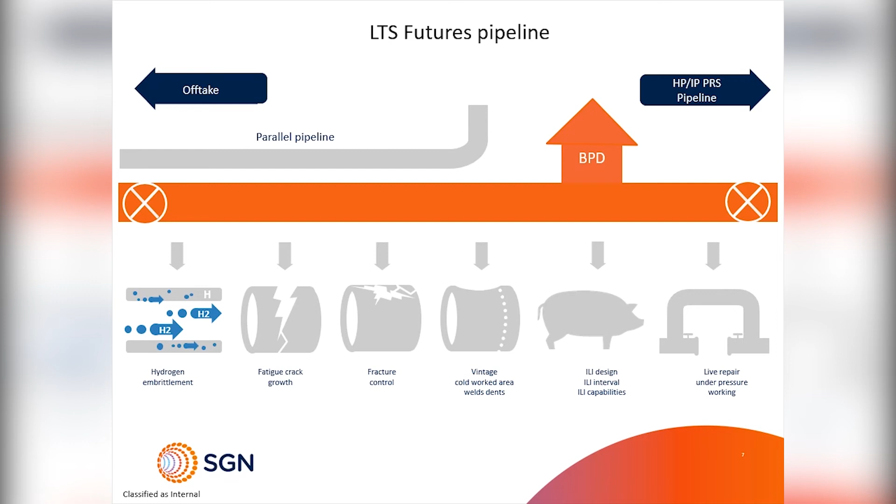The inspection, maintenance and repair desktop study under the High Technical Project will review repair techniques and their suitability on hydrogen pipelines. Further testing may be required on repair techniques and methods under a hydrogen environment, which can then be later validated at live trial.

Following on from the pressure reduction installation and QRA desktop studies, and SR25 update under High Technical, further work will be required to repurpose PRIs. The graphic shown shows the work anticipated.

National Grid Gas Transmission's Project Future Grid will be investigating repurposing a decommissioned PRI. This work will fill in some of the gaps associated with repurposing PRIs.

Under the PRI desktop study, the consultancy expert has issued a spreadsheet to collate all the GDN's PRI asset data to fully understand which components require further testing.

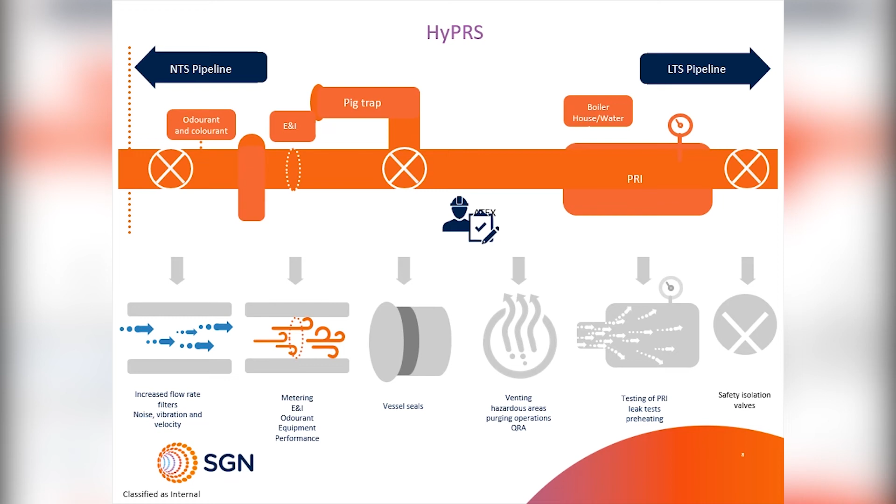Work done under PRI and SR25 will allow GDNs to understand the effect of hazardous areas and the impact of repurposing or rebuilding PRIs for a hydrogen future.

The LTS Futures programme is designed to develop the safety, technical and practical evidence to support the use of hydrogen in the LTS. In the graphic shown below, you can see how network safety and impact follows throughout all the aspects of the programme.

To meet the projected hydrogen demand, new hydrogen pipelines and repurposing the current network is required. The LTS Futures programme will complete work to decarbonise the LTS network.

This includes providing the safety and technical evidence to install new LTS hydrogen pipelines, shown here, going to an industrial cluster, and a live hydrogen trial to repurpose the LTS pipeline on the Granton to Grangemouth, shown as the live trial.

This will deliver a blueprint to repurpose an LTS pipeline for hydrogen, ensuring that all these gaps are filled to repurpose the current LTS network, so we can roll out and help system transformation.

To ensure the Granton to Grangemouth pipeline is suitable for repurposing for hydrogen, further material testing on the weakest part of the pipeline will be completed to determine it is fit for purpose to be repurposed for hydrogen.

Once the material testing is complete, a repurposing study will be completed to ensure all gaps are filled for the live trial. The repurposing study will assess all known and new risks and assign frequency, feeding into the detailed QRA in advance of the trial.

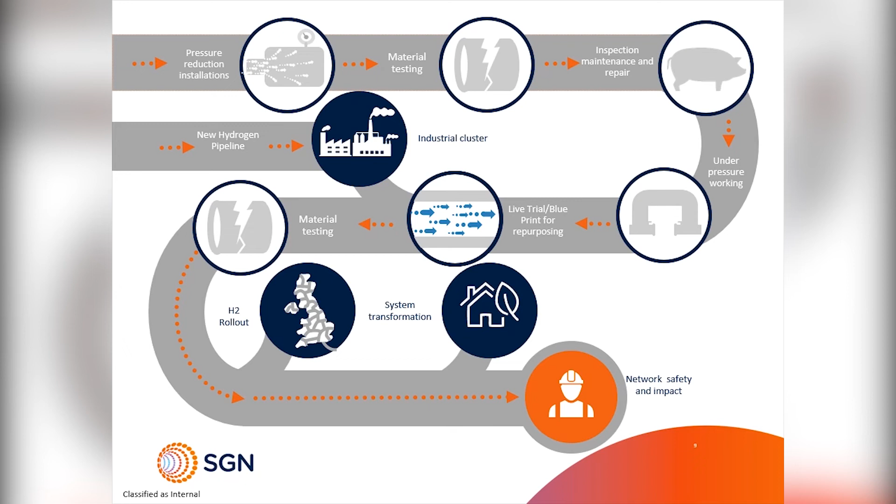This will allow rollout for repurposing LTS networks to help decarbonise industrial clusters and support system transformation.

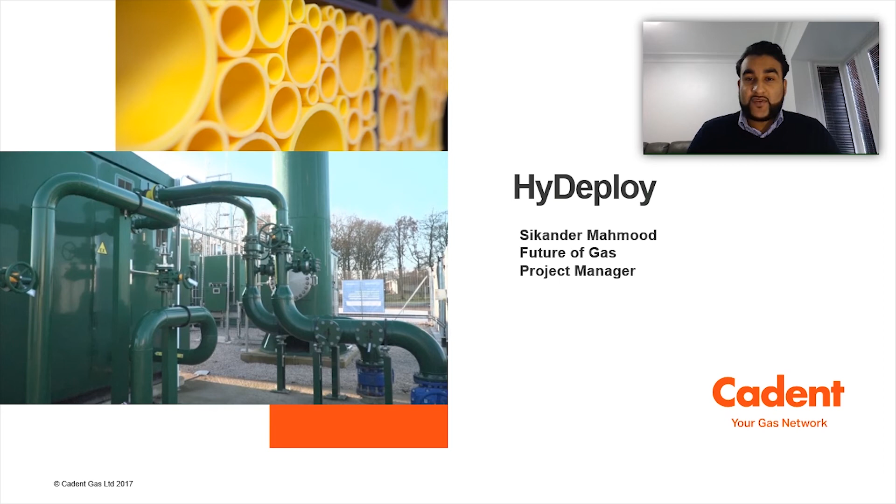Just to give you a brief overview of what I will be discussing today: I'll touch on the strategy for decarbonising the UK gas supply and why we want to blend hydrogen into the networks. I'll then hone in on our project HyDeploy and the subsequent phases which come under HyDeploy 2, and give you an overall view of the wider picture in terms of HyNet, and I'll welcome questions at the end.

The majority of homes in the UK rely on natural gas for heating and cooking, because it's well suited for the UK housing stock. The gas distribution networks have made significant strides towards decarbonisation and reducing the carbon intensity of the gas network, whether with biomethane projects or innovation projects such as BioSNG, which looks at converting black bag waste into gas.

There's work going on across Europe looking at hydrogen blends and how they can work within distribution networks, and that's what I'll really focus on today. It's all working towards progressively supplying closer to 100% hydrogen to selective consumers, such as heavy industry users, or using it for transport fuels in HGVs, buses or trains, or for power generation and new developments.

So what is the HyDeploy project? HyDeploy aims to demonstrate that for the first time we can blend hydrogen up to 20% by volume within the current natural gas infrastructure, and that it can be done safely and efficiently. We're working with a project consortium led by Cadent.

We're working with Northern Gas Networks, Keele University, who are the host site for the first demonstration, the Health and Safety Laboratory, who are focusing on that scientific evidence base, ITM Power, who provide us with the electrolyzer, and Progressive Energy, who are working on the overall project management. There's real potential to deliver some carbon savings with HyDeploy.

So why blend hydrogen into the gas networks? There's a few reasons, and one of the most important is that there'll be minimal disruption for consumers. We won't need to change the appliances in your homes - the boilers you use to heat your homes, your cookers, your gas fires, we can keep those the same. We also won't need to change all the pipelines we use to distribute the gas currently.

Whilst we're making these changes to the gas composition, we can start to improve the hydrogen supply chain, helping us get closer to the goal of 100% hydrogen. In the meantime, we'll be able to make some real carbon reductions - it's like removing 2.5 million cars off the road if we were to blend across the UK. That's a real deliverable roadmap for deeper savings.

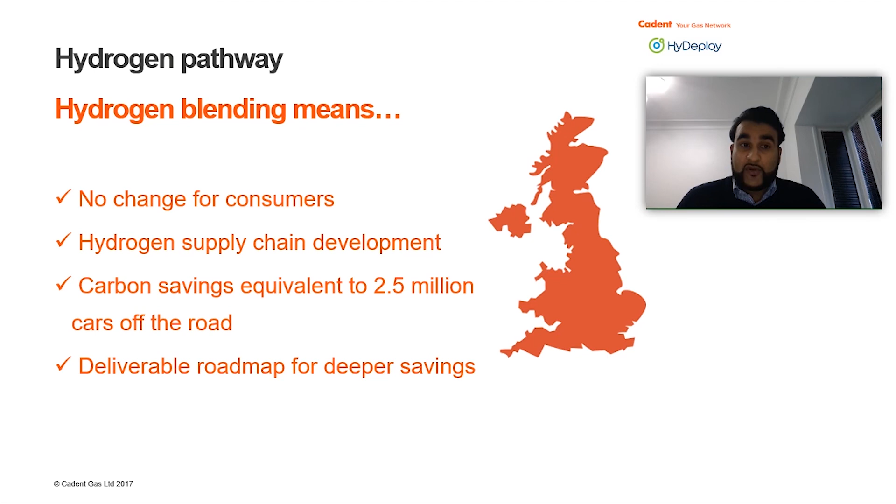The deployment of hydrogen as a low carbon energy vector is crucial to the UK in achieving the legislative targets of net zero by 2050. Hydrogen has been highlighted by numerous stakeholders, including the government's independent climate change advisors, the Committee on Climate Change, who outlined in their May 2019 net zero report that moving beyond an 80% target changes hydrogen from being an option to being an integral part of the strategy.

In terms of the timeline of the HyDeploy project, we started off in 2017 building the safety case for what would be our first demonstration project at Keele University. We built the safety case, then went on to install the equipment on site, and we're currently in the live demonstration phase at Keele. That's been extended due to COVID-19, and I'll touch on that in a later slide.

After the Keele demonstration, we aim to have a demonstration in the northeast of England. We are currently building the safety case for that and creating the design and install for the equipment on site. Following the northeast demonstration, we will do a final demonstration in the northwest of England, where we will follow the same process and tackle the evidence gaps not addressed in the Keele and northeast demonstrations.

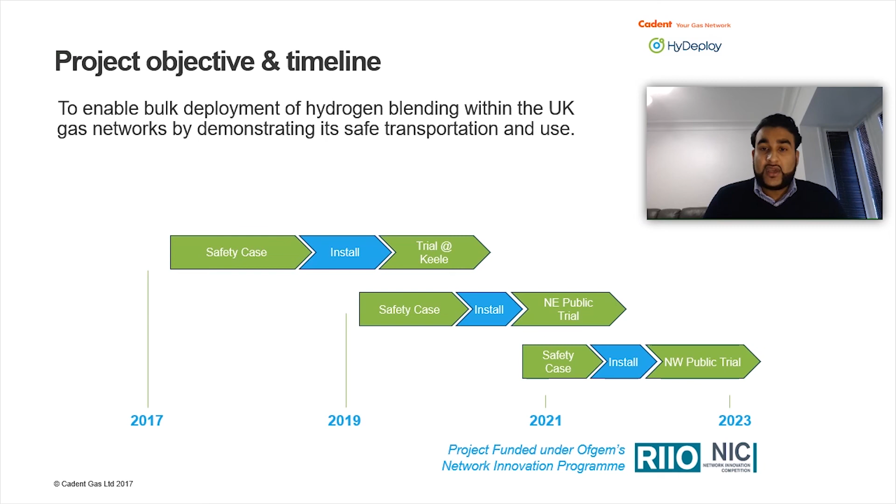Conducting our first demonstration project at Keele University was a real no-brainer. It's like a small town on gas, with around 100 residential properties, some multi-residential buildings and some commercial buildings such as office blocks and laboratories. Because Keele own and operate their own private network, it really reduced the complexities in terms of commercial arrangements.

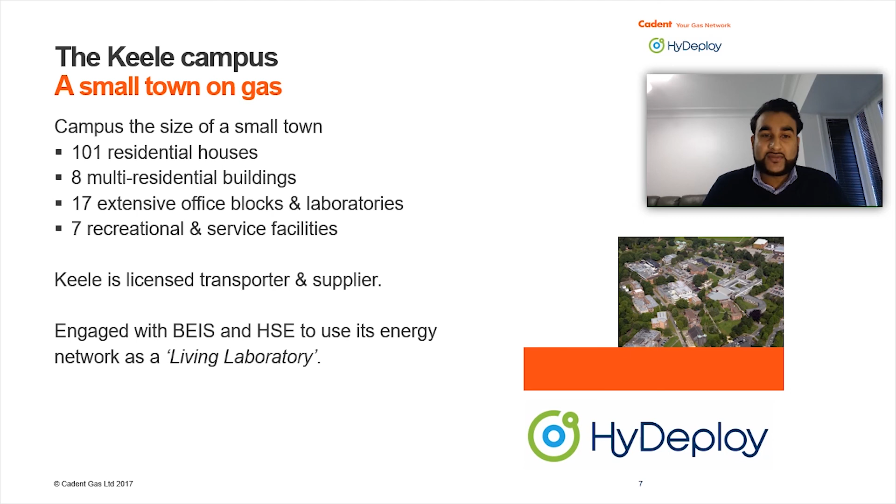I touched on the safety case in one of my previous slides, but what does that actually mean? The UK has a strict regime in terms of safety. There's gas safety management regulations which stipulate that you can only have 0.1% hydrogen within the gas networks.

So we were required to build on that safety case and create the evidence base to obtain an exemption to those regulations. So we carried out some work on appliances, testing them to ensure they operate safely on blended gas, looking at boilers, cookers, and gas fires.

We also carried out some testing on materials, the materials that consist in the pipelines in our networks, such as plastic, steel and metallic pipelines. We also did some work on gas characteristics, understanding how gas accumulates in somebody's property, and understanding the consequences if blended gas was to ignite in comparison to natural gas.

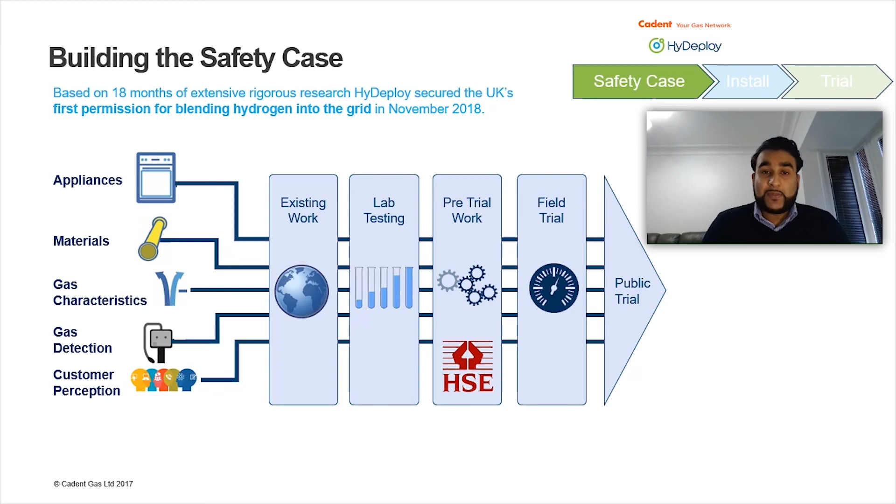Also working on the operational procedures and the gas detection we use as part of the GDN process. And finally, focusing on customer perception, Keele University provided us our first opportunity to have hydrogen in homes and really understand the customer perspective. Grouping all those together, we were able to build a safety case and achieve the first exemption in the UK for that GSMR regulation, allowing us to blend up to 20% into the Keele network.

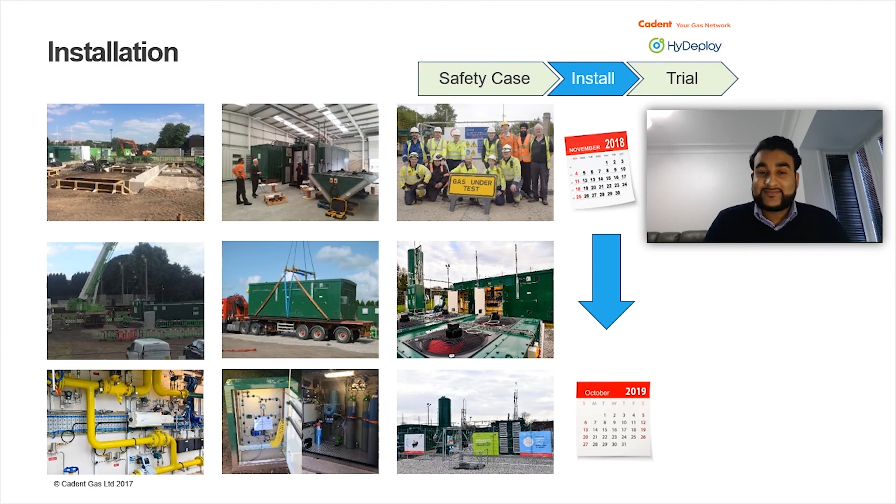We're producing hydrogen on site via the electrolyzer using a process called electrolysis, which uses electricity to split water into hydrogen and oxygen. The hydrogen is then stored in the buffer tank. The buffer tank then provides the hydrogen to the hydrogen grid entry unit, where it's blended with the natural gas.

That blended mixture then goes around a volume loop to ensure it's the correct composition of hydrogen and natural gas. That mixture is then released into the blended gas outlet in a medium pressure pipe which goes into the local pressure reduction station, where it's reduced in pressure and distributed into the low pressure network at Keele University. And it's as simple as that.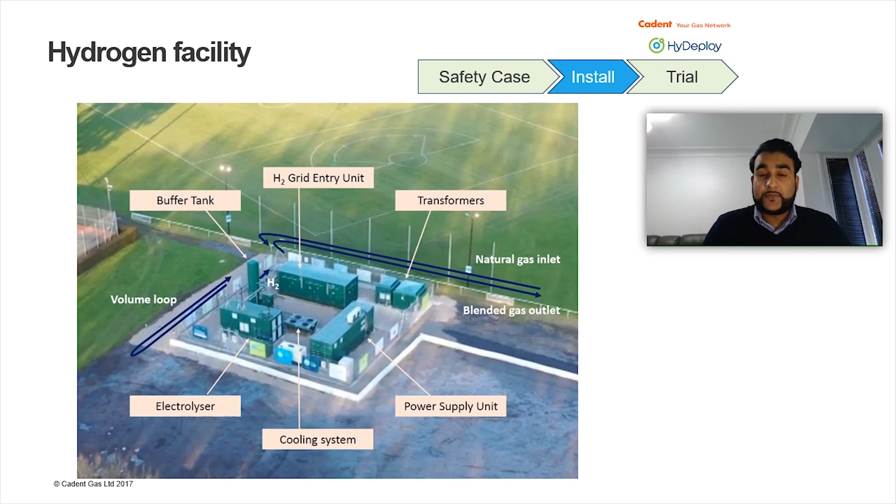So where are we now in terms of the HyDeploy project itself? I mentioned that we were able to achieve the exemption to the safety case. I mentioned that we completed the installation on site, which you can see in this picture here, the fully constructed compound. I then mentioned that we started the live demonstration at Keele University, and we have been blending on site.

We've not experienced any issues with the appliances in people's properties, and we've not experienced any issues operationally in terms of the way we operate the gas network. In parallel to the demonstration, we're also running a boiler project where we have 8 boilers, 4 running on natural gas and 4 running on blended gas.

At the end of the project, we'll strip down those boilers and send them back to the manufacturers, firstly to see if they can understand which one was on blended gas and which one was on natural gas without telling them. Then they'll do some testing to understand if blended gas had an impact on the components within the boilers.

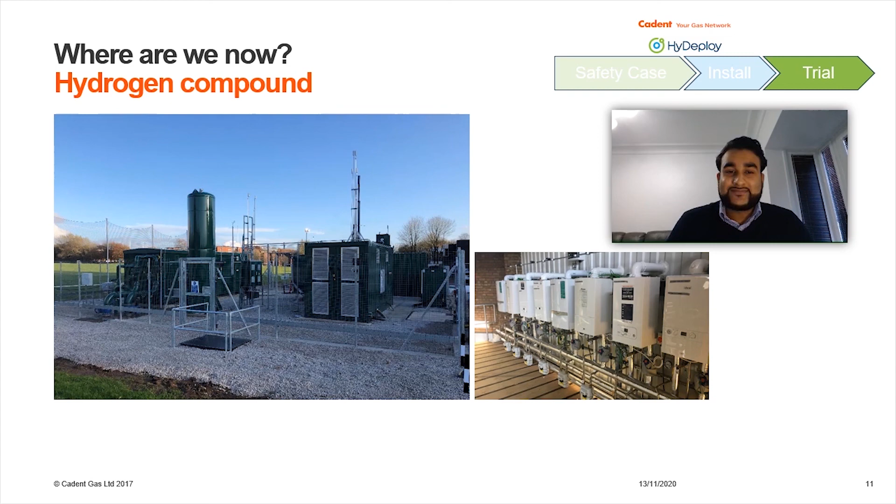Moving forward from HyDeploy at Keele University, we step into HyDeploy 2, which is essentially two public demonstration projects, one in the northeast and one in the northwest. The objective is to build on the work we're doing at Keele University and demonstrate that blending hydrogen and natural gas can be done safely and efficiently in the UK distribution networks. The outcome would be that a supplier is able to apply and inject hydrogen into the gas network, just as biomethane producers can today. We're using the same project consortium to really tap into that expertise and experience from Keele University.

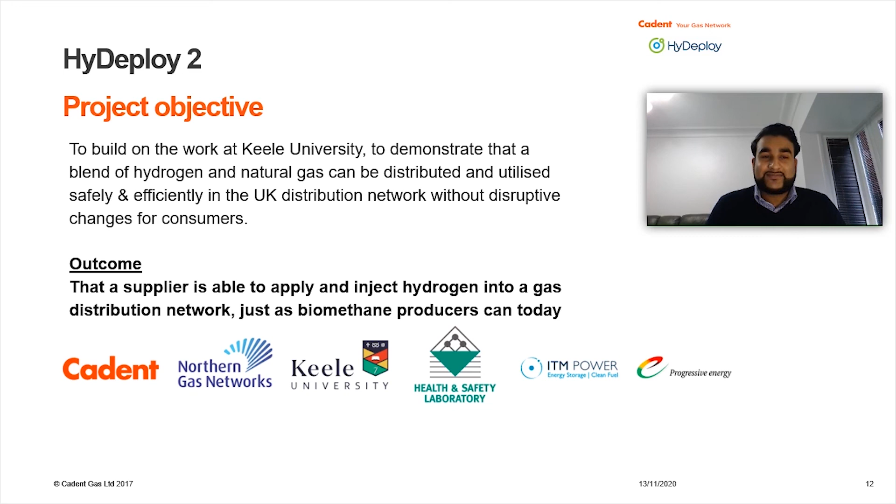Looking into the trial principle across these demonstration projects, we want to start to reduce the additional mitigations we're putting in place as that technical evidence increases. That will help us build a picture for rollout of blended gas across the UK.

At Keele University, we started off by doing gas safety checks on all properties. We also conducted testing with bottled mixtures of hydrogen blends in the appliances.

In the first public demonstration, we also want to test as many properties as we can using the gas safe checks. But we're starting to wean away from bottle testing and not doing any bottle testing in the properties, because we've been able to gather that evidence at Keele University.

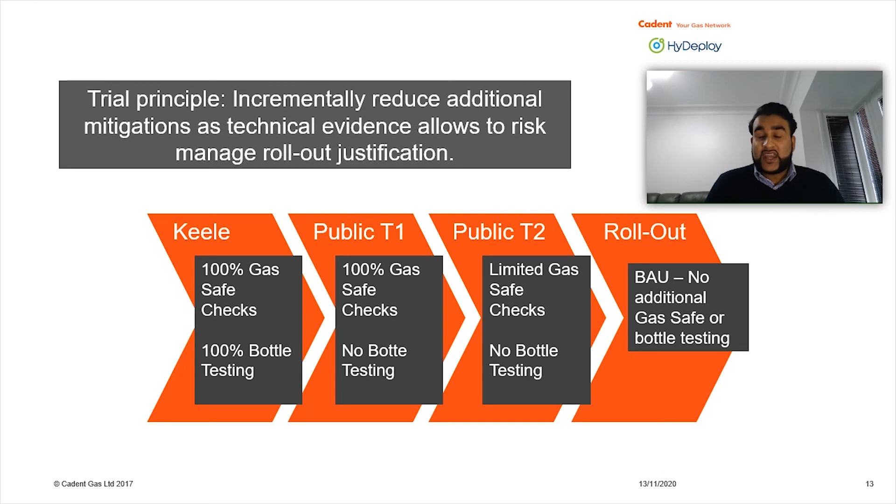In the second public demonstration, we want to start to limit the amount of gas safety checks and again have no bottle testing, because to have a position for rollout across the UK, it's not feasible to go into each property and continue the gas safety checks and continue the bottle testing. But we now have the technical evidence to enable us to justify that position and show that it will be just as safe as having natural gas in your homes.

The first public trial in the northeast of England will be located in a village called Winlaton, which is in Gateshead. We'll be delivering a blended gas mixture to around 670 properties in that area, building on the evidence we've gathered at Keele University and really tackling those evidence gaps. There are more properties here, a diverse user base, and it's on a public gas distribution network.

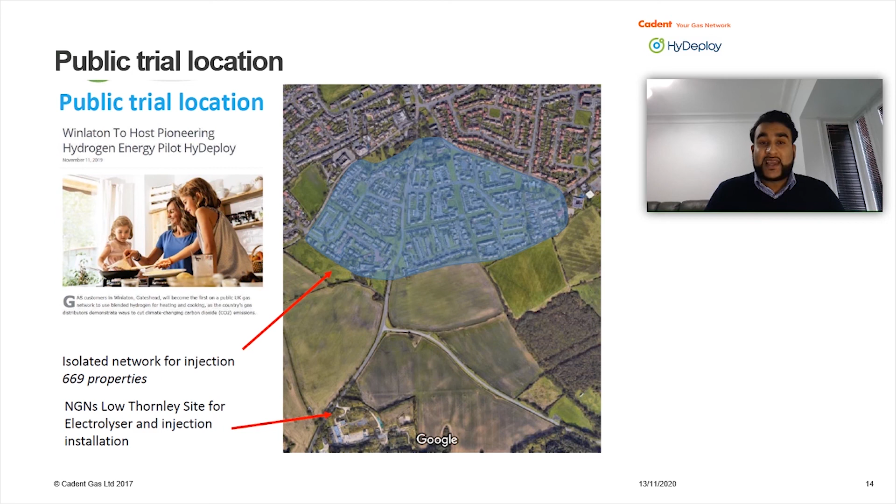This is really where HyDeploy comes into play. The evidence we'll be able to gather using the HyDeploy project will allow us to tap into that source of hydrogen and create a blend of hydrogen for a wide variety of users within the Northwest, edging us that bit closer to the target of net zero.